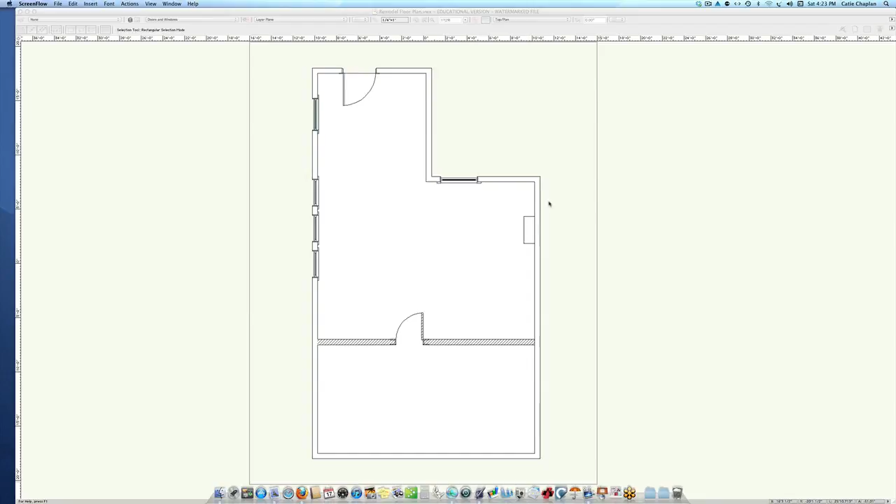Alright, let's get some of the new walls in there. So the first thing I'm going to do, just to clarify things for me, is turn this off.

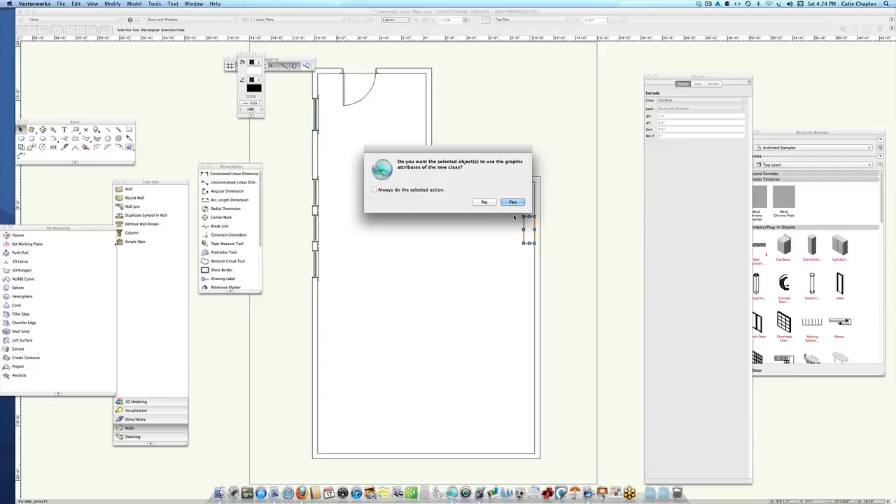Old walls. And actually, since that chimney's going, I might put that in the old walls as well. Maybe I'll just change the name of that to old or something. But here I don't want the chimney to take the graphics of the other wall, so I'm going to choose no.

And there we go, we get to start over. So we need to get a wall in that's 12 feet away from this wall.

I'll draw a wall that goes across here, and then I'll use dimensions to place it accurately.

I'm going to turn off snap to distance first, just to clear up the screen a little bit. I'll use Smart Edge for the next wall.

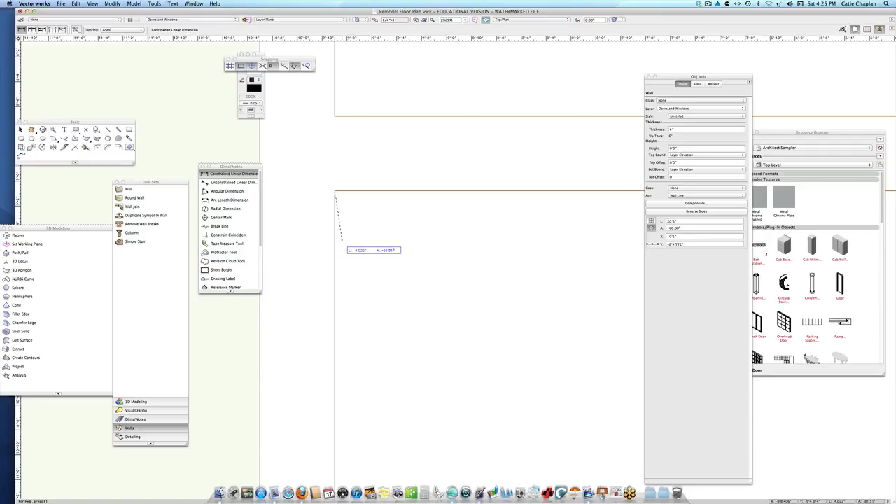If you have a hard time seeing the point, zoom on in so I can get the corner. And then right in the middle of doing this, I can go back to my full view.

And this needs to be 12 feet. I'll pin that. This corner down here, I'll enter in 12 feet. And I've moved my wall. I'll get rid of that dimension, I don't need it.

I now need to put a wall that's 12 feet over here, and then we'll get some doors in that. So this time I'll set up a Smart Edge, and my offset will be 12 feet.

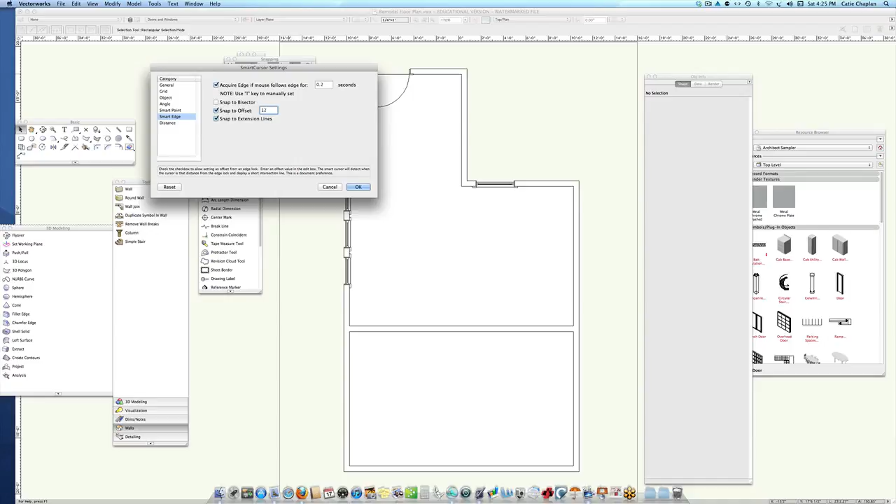And I'll have to be careful about which side of the line I control. I'll pick up my Smart Edge. I'll come over here.

Oh, I picked up the wrong Smart Edge. I need to come 12 feet over from here. So no harm, I'll pick up this Smart Edge.

Come over, there's 12. But because I was coming from this side, I have to control the other side of the wall. Slowly but surely I'll get it, as will you.

So I'll pick up my Smart Edge. However, I want to make sure that my Smart Edge is on the inside of the wall. Remember, walls have outsides, insides, and middles. There we go.

Alright, much better. Now, I didn't draw that all the way across, but that's okay because you can stretch walls after the fact.

The last thing I need to do is get my door in here. A couple of doors.

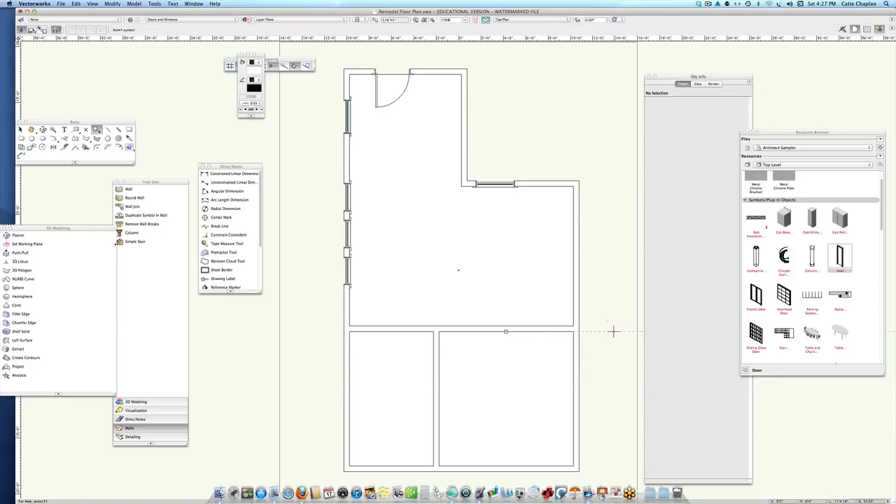I'll put my door in here, and I'll put a door in this wall too. Let's see, we'll choose a different configuration. Maybe a bifold bipart door might be nice, or maybe a pocket door.

Let's do a pocket door, and we can make that 4 feet, not 4 inches, 4 feet. There we go for our laundry room.

We can reposition that. I'll make this a slightly larger door, 30 inches. I didn't spec out where those doors are - that would be something we could determine later, but we basically have our new walls.

Now what I'm going to do is select everything that I drew that was new - that wall and that wall. So even though walls are connected, they still remain discrete sections of wall, so you have to select both of them.

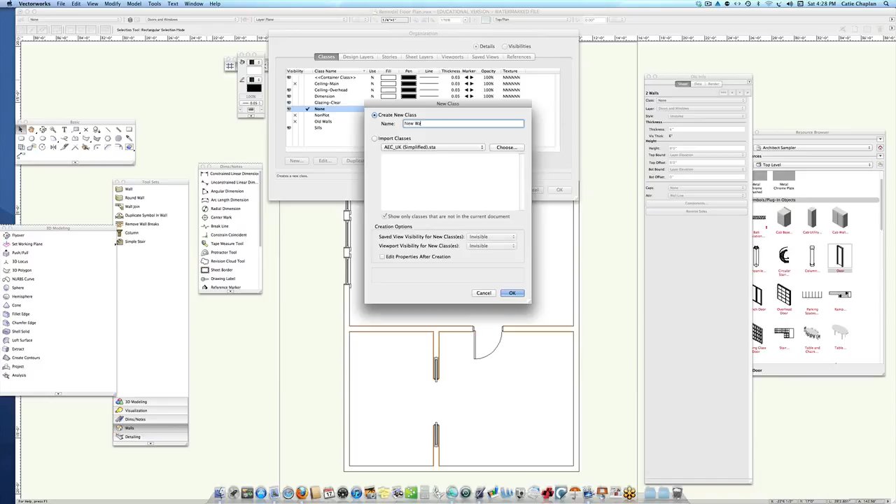I'm going to create a new class called New Walls or New Stuff. And I could give this a new color if I wanted to be able to depict that.

And then I'll put those in the new wall class. And then I have to select the door and put it in the class, and the other door, and put it in the new class. Yes.

So now you have a nice file where you can show - I'll turn off the new, turn on the old, that's the existing. And then I can turn off the old, turn on the new, and that would be the new walls.

So let's see what we have just in our architect sampler. We've got clothes washer and dryer, so we can drop those in.

Now I don't want to have these inserted in the wall, so I'm going to turn that off. We can figure out where we want to put our dryer and our washer.

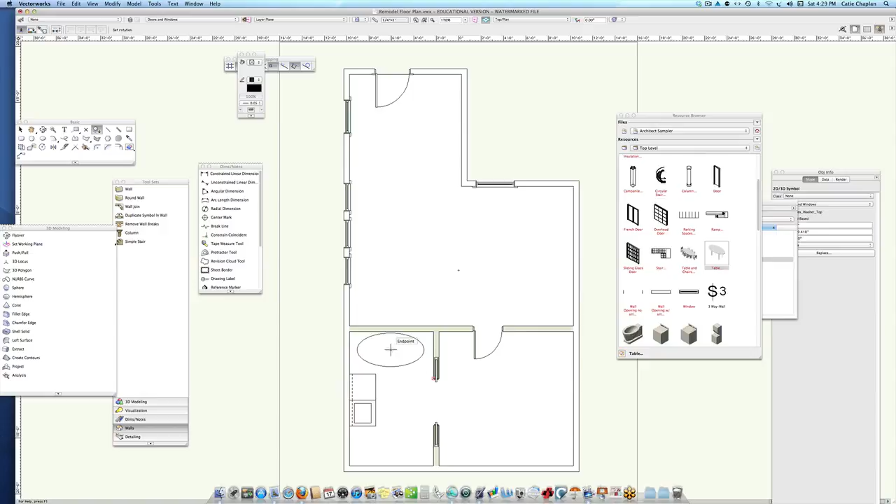If you wanted to, you could put some cabinets in here. We'll look at cabinets next week. Maybe you draw a little shelf over here.

And then I'll put the lavatory in. I've got my lavatory and sink.

And Kohler gave Vectorworks, or partnered with Vectorworks, and there are libraries. Let me go show you where those are.

If you go to libraries, objects, building services, there are tons of Kohler products.

Now, lots of manufacturers allow you to import plug-in objects, so you can go to their website and download some of these library items. So if you had a particular Kohler sink that you wanted, we can open this up and see what's in here.

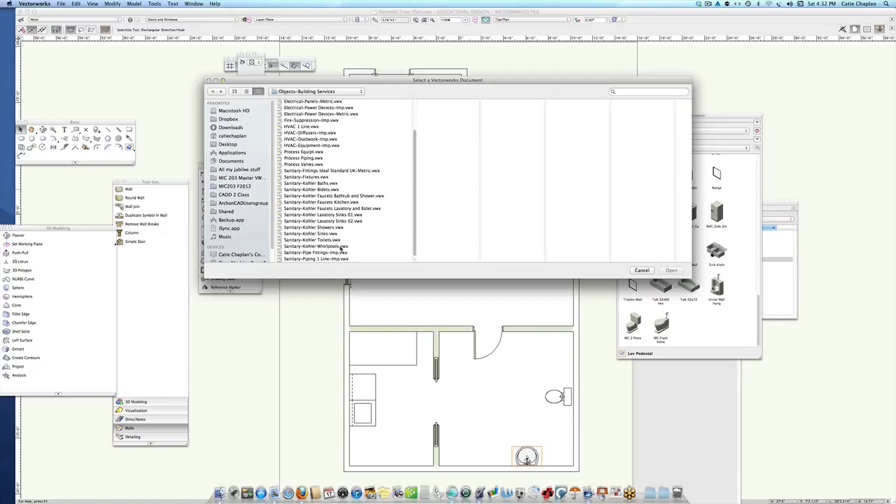Look at that, Kohler showers. Let's open that up and see what they have. So we can certainly drop in a shower pan or a shower with a surround.

Here's maybe a tub, shower. So the first click allows you to place it, the second click rotates it.

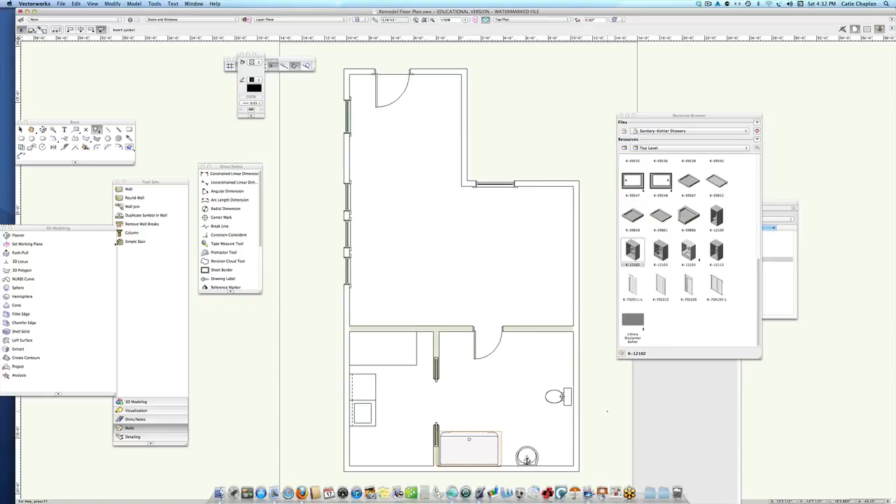I have no idea what the rotation is on this. Let's take a look at this. There we go.

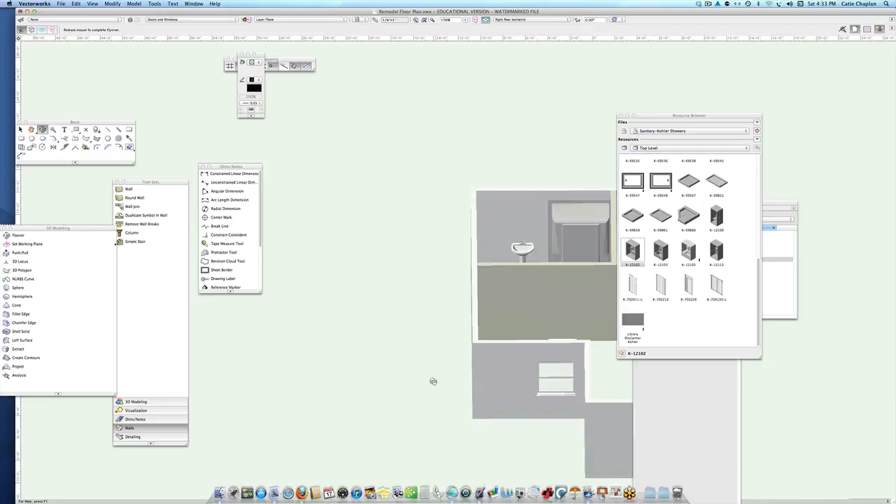That's hard to see. It appears as though I have that in backwards, so I'm just going to rotate that around. Command L, Command L.

There we go, we've got our shower surround, and very quickly our remodel floor plan is taking shape.